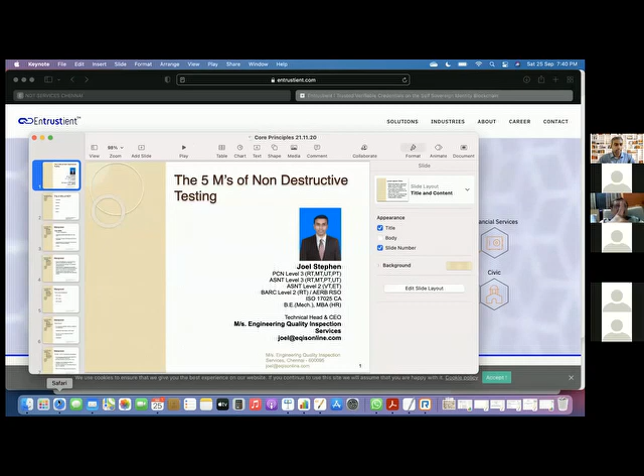As Mr. Sandeep was saying, I head an industrial commercial lab with NDT, chemical and mechanical testing facilities. We do a lot of projects in and around Chennai, focusing on new NDT techniques like phased array, and we also involve ourselves in digital eddy current testing. Our most significant project was the Chennai Metro Rail project, where we stood with the team for the complete erection of all the columnar pillars in Chennai. I'm also the founder of another company called Entrustient.

Here we deal with IT stuff we call verifiable credentials, where our certificates and other identities are not given to anybody - they remain under your control. So these are the two organizations where I'm involved with the administration.

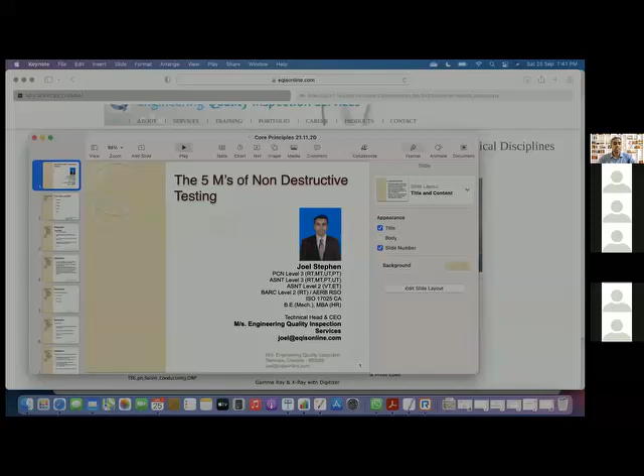So typically I would try to go to my slides. I specifically wanted to pick this topic because it's a Saturday evening, and if I were to talk about technical physics and all that, probably the participants would get reduced to half. So I wanted to do something more about decision making.

I don't want to make decisions for you. I want you to be in a position where you will be making your own decisions based on the inputs that I'm going to give you today.

I have level 3 certification - level 3 is a level of certification with both the American Society as well as the British Society. I also happen to be a radiographic safety officer with the Government of India, and I have done my HR and MBA. So these are my credentials.

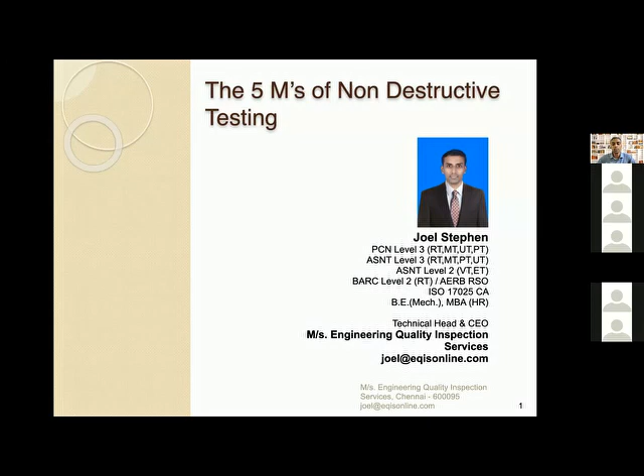So I would just go on to the technical presentation. The title, the five M's of testing, was kept as a surprise because it gives you a curiosity factor as to what are the five M's.

This is the presentation slide, and you'll have the pane on the left side, like an explorer, which will tell you where we are right now. This will help you navigate where we are in the presentation.

To start off, the five M's of NDT, or non-destructive testing principles, are manpower, machine, material, method, and the money involved. All these five factors influence the choice of NDT. We'll be going into detail on each of these topics.

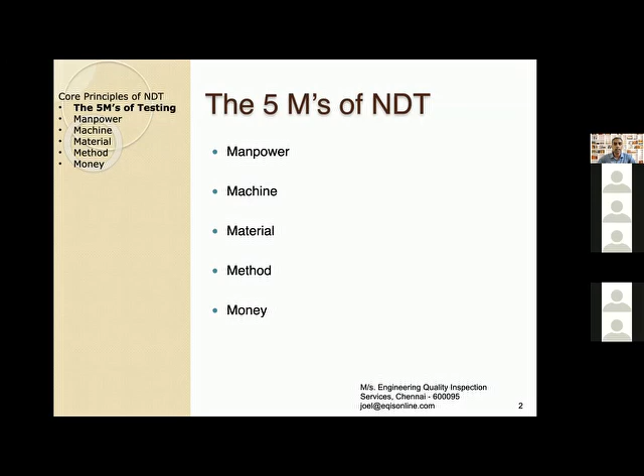If you were to head an NDT, or at some point involve yourself in an NDT activity or organize one, these five factors will help you a lot in making the right decision. So to start off, I would like to begin with manpower.

We have a proverb in Tamil that says, 'Aal padi, aadai padi,' which means the person matters more than other things. It's like half is your presentation and half is the man himself. So when I talk about manpower in NDT, it's like finding a pearl in an ocean.

It's easy to say there are no defects in the job, but it's very hard to actually find a diver who will go and pick that pearl and say, 'see, here's the pearl in the ocean.' NDT is something like that - the skill of the person is very, very important to find a defect.

Whereas 90% of regular operators will say this job looks good, there will be only one operator who will be able to find out exactly where there is a discontinuity for us to deal with. So what is required in NDT manpower is a person who has an understanding of what he does. For example, if I am operating NDT equipment, it should be like the NDT equipment is listening to me.

I should have mastery over what I'm operating. The technician should be in a position to understand and listen to what I wanted to do. It's not that the machine looks high tech and I just keep it in place and it gives me a result, and I take this as the result without any verification. It shouldn't be like that. It should be the other way around, where I know all the parameters of the equipment. That understanding comes from experience.

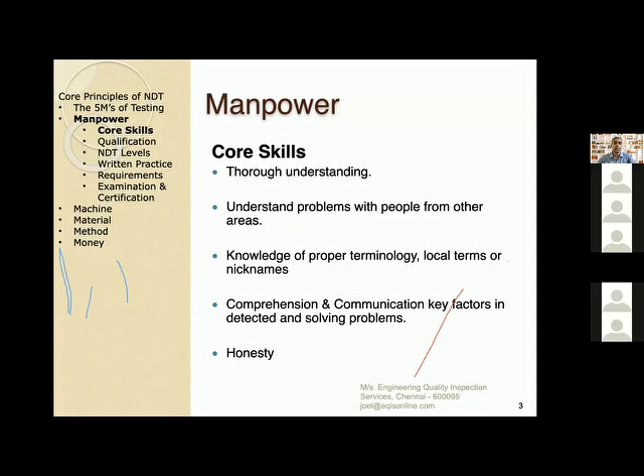So the technical societies, just like yours, have certain technical societies which have drafted documents which help - suppose there's an employer who doesn't have any knowledge about NDT and he wants to set an NDT system in his company, he needs some documentation which will help him understand or start off with what are the basic requirements. So these documents like SNT-TC-1A, ISO 9712, and CP 189 are documents which help an employer pick an NDT personnel based on the criteria given in these standards.

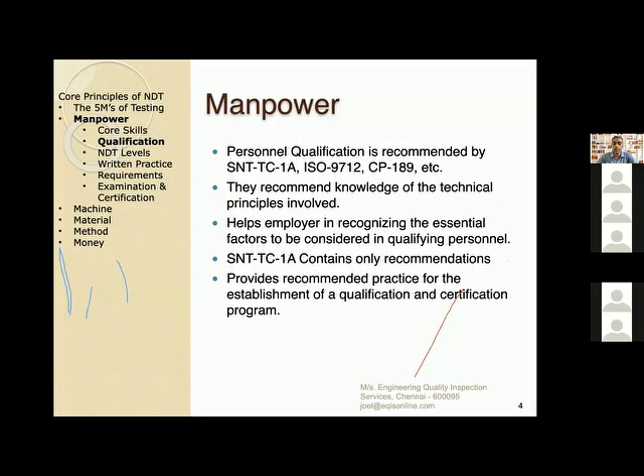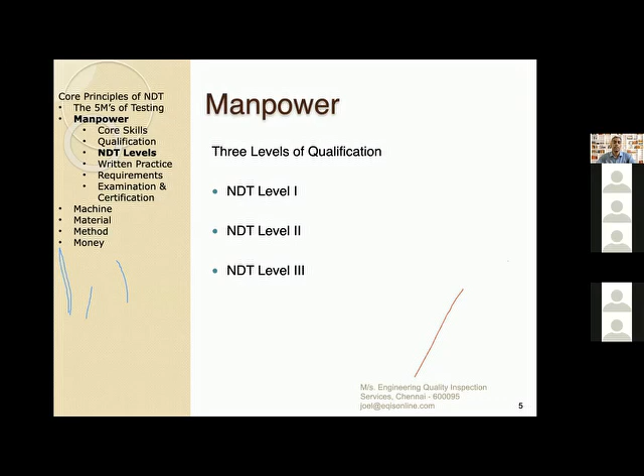So it's a recommended practice. We call it a recommended practice because nobody asks you to mandatorily follow all these, it's just a recommendation. This recommendation talks about 3 levels, where level 1 deals with just the operator of the equipment. Level 2 refers to the interpreter of the results, and level 3 defines the higher severity, where he needs to take care of the entire NDT management, including drafting, giving SOPs. Level 3 is a person who actually designates and organizes an NDT activity, he is the coordinator. So there are 3 levels, and these are well documented in a document called Written Practice.

I'm sure most of you would know what a written practice is. A written practice just says how many questions should I ask for the trainee to get selected as a level 1, level 2, or level 3? How many hours of training should I give them? What is their responsibility being a level 1, 2, or 3? And how to control the exam or administer training, control the training and qualification. What topics should I take in the class? All these are given in these documents, which is a ready reference for any employer to start off with. So any company looking forward, from an administrative perspective, to start an NDT should first get their hands on this written practice and try to understand the requirements for a person to get qualified as an NDT personnel.

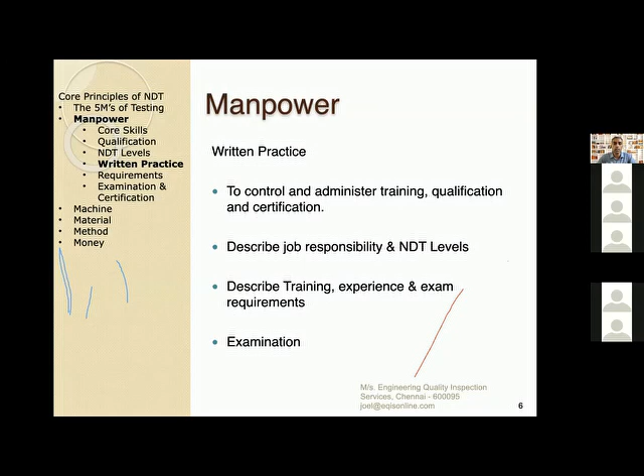And finally, to summarize the requirements of NDT, it's just a few things. You can employ anybody who has a formal education right away. You can employ them as an NDT personnel in your firm if he has formal education in physics, maths, and chemistry, and has training, and if he's done a 4-year college, then his training hours can be reduced by 50%. And if the person does not have any formal education, if he works for more than 4 years, he can still be eligible to take up the examination and go ahead with the certification. So training is given as per the written practice. And if these standards allow non-native speakers, like if they don't have English as their mother tongue, they can take additional time.

And these are the benefits given to non-native speakers. It also talks about the training hours and experience required. So these are the requirements to qualify a personnel into an NDT field.

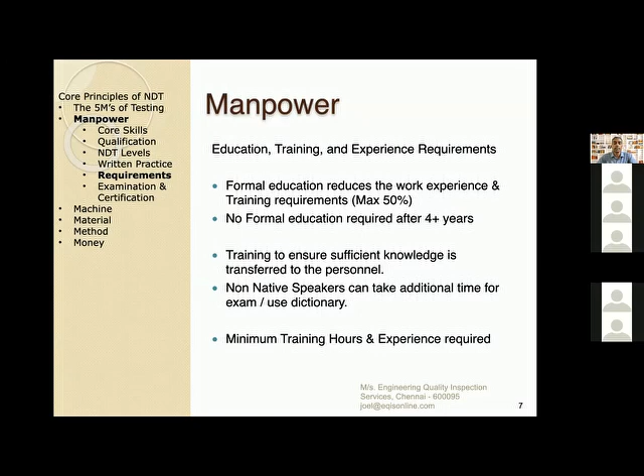And for the examination, we have 4 different examinations. The first one being the vision examination. Vision examination is very important because I have personally faced certain people who are colorblind, and they will not reveal it to us. What happens is, for most NDT techniques, your eye is your sensor. You will have to have an eye for defects, an eye for detail, where you will be able to spot the color and say this is the defect.

So if a person is colorblind and we don't have a proper vision examination, he might have very good knowledge. He will clear all the other 3 exams. And when you have to actually put him into a scene where he has to find a defect, he will not be able to do it. This is like, operation is a success, but the patient is dead. So the idea here is, the vision examination stands first in any NDT activity.

Then we have general and specific examinations, where general talks about the entire NDT principles and such things. In specific, it talks about the particular job I'm dealing with. Suppose I'm dealing with a casting or a weld, then I ask questions very specific to welds, or if there is a casting, I ask questions specific to the casting process. And then we have a practical examination.

And one common thing about all these documents that I was talking about, SNT, CP 189, and ISO 9712, is that they all demand a pass mark of 80%. All through our academics, anywhere between 35 to 50% is the pass mark. But NDT organizations require you to score at least 80%. Anybody want to guess why we need an 80% pass mark?

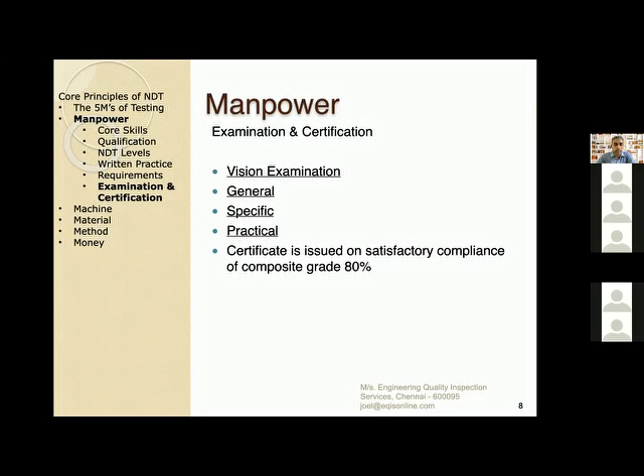Okay, fine. So the next M that we are going to talk about is the machine, or the equipment.

When we talk about the equipment or the machine, there are lots of applications where we get to decide where the machine stands. So if I have to choose an equipment, for example, let's say for a place where I have access only from one side, let's say it's a fuel tank. The fuel tank is going to have one inlet where I can pour in the fuel, but the inner part of the tank is not at all accessible.

So if I want to reach or inspect such a tank, I have to think of an equipment that is capable of scanning the entire thing only from the outside, which will help me detect if there is a problem with the product. Or if the component is too high in temperature, I'll not even be able to touch the component. Then I have to think of a non-invasive way where I can reach the component and pick or choose a method which will help me find the defect inside it.

And so forth, we have the area of interest. Suppose if it's in the nook of a place, or if it's in the center, or if it's at some elevation. These are the factors where I have to come to a point where I decide which equipment I want to choose.

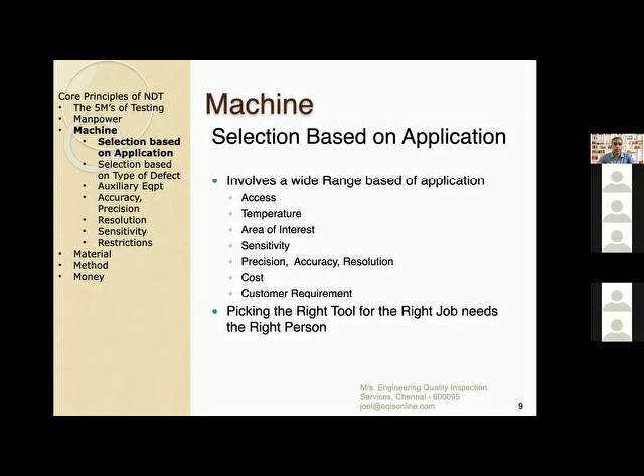Having said that, if I have to pick an application based on the defect that I want to find, then again, I have lots of defects where, if it's just on the surface, I'll have to pick an NDT technique. If it's a little subsurface and not open to the surface, I have to choose another method. And if it's a crack, for example, it's a two-dimensional defect, it's just going to be a line. So I'll have to use a technique which will be helpful to find a line.

And there are volumetric defects which are like, for example, a gas porosity or a hole, or probably a slag inclusion or a foreign inclusion. So if there is an inclusion, it's going to have some dimensions, it's going to have a three-dimensional image. So I have to choose my technique based on the defect and then pick the correct equipment for that defect.

And we also have another criteria called the contact criteria. This I was telling in the previous slide, when the temperature is too high, I will not be in a position to go and touch the component. So I'll have to use a non-contact method.

And if you talk about your hospital where we go and take a CT scan, for example, or an X-ray, for example, if you have a defect, if you have an injury in your hand, if the bone is, let's say, fractured, for example...

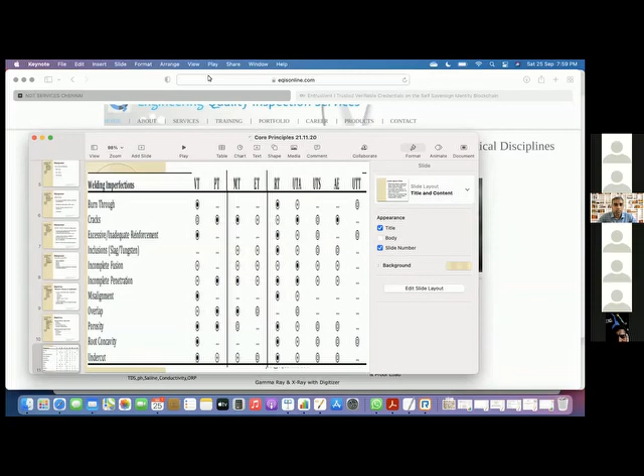Joel, your voice has gone. I think I got disconnected. Hello. Yes, Joel, you can start now. Yes, now you can start. Okay. So I just want to know which slide I was on when I got disconnected.

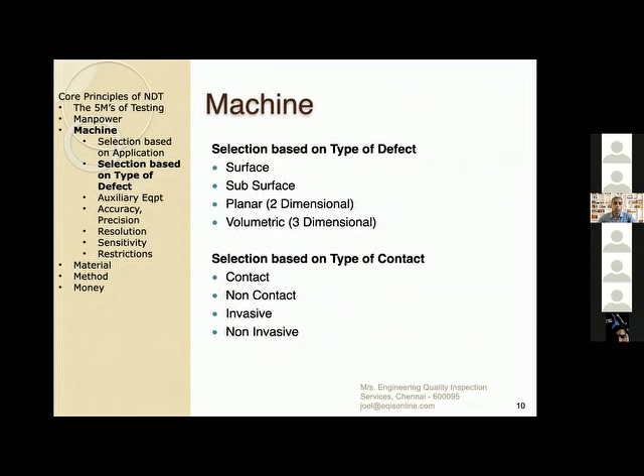So I just wanted to show you the slide where we can see the type of NDT technique on the top and the defects on the left-hand side, and which technique would help us to find it. So VT stands for visual testing, PT stands for penetrant testing, MT stands for magnetic particle testing, ET stands for electromagnetic testing, RT stands for radiographic testing, ultrasonic testing angle, ultrasonic testing shear, acoustic emission, and ultrasonic thickness gauging.

So it's just an overview. The black dot here says it is 100%, or the probability of detection is very high. The one with the star says it requires special techniques. And one with the circle says any standard method with the proper technique, and only then you will be able to find that defect.

So it is very interesting to note, for example, if I have a crack in my component, radiography testing is what most people get into their mind, that if I take an X-ray, I'll be able to see the crack. But on the contrary, this is not the right method to detect a crack. X-ray will not reveal any cracks, and it requires a very special technique if you want to find a crack using radiography testing.

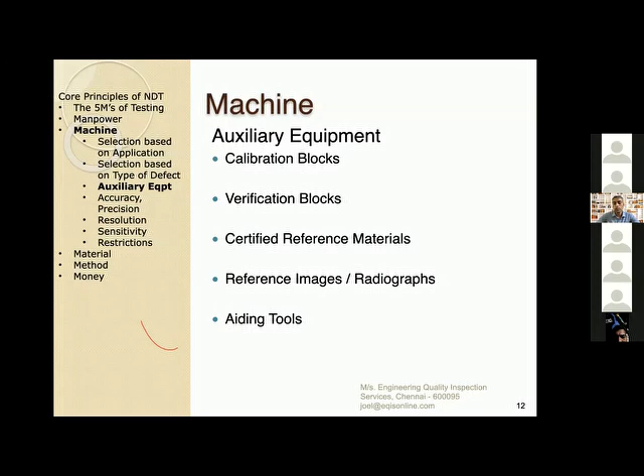So to give you a typical example, I want to show what happens when your machine is not working properly. Suppose I have a weighing equipment, and my mass is 10 kg, but every time I weigh it, it gives me 5 kg minus or 5 kg plus. So it will either say 5 or 15. The error is always 5 kg, but it's consistent. The point is, it is either on the plus or on the minus, but the 5 kg error is not going to change. So that is not going to help me.

But if I validate with my auxiliary equipment or my verification block, I'll get to know how much my equipment is deviating.

Do you want to take a question? I think I had a raised hand.

So when we talk about precision, here the case is I'm always getting a 5 kg error on the positive side. If the mass is 10 kg, my machine is going to show me 15.8, 15.2. This means the values are repeatable. The repeatability is very good, but the accuracy is poor.

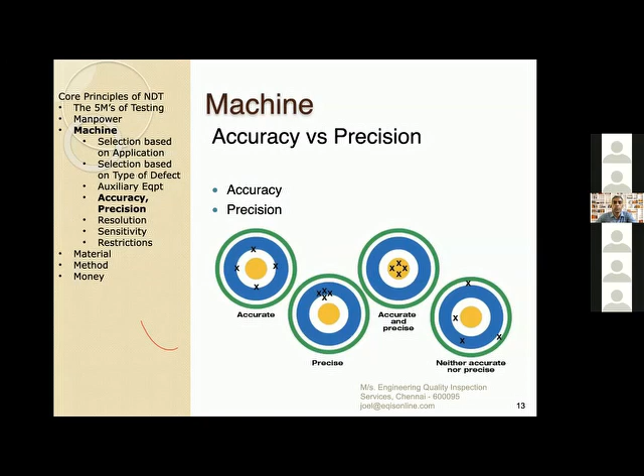But when I say an equipment is accurate and precise, that means it's always showing me close to 10, showing 10.2 or 9.8, within the range of precision that I require, and the values are repeatable. The same goes with any NDT equipment, where you also have to be precise with your results. The repeatability should be there, and you should also have accurate results.

Another factor that goes along with the equipment is the resolution. With any digital equipment, resolution refers to the smallest change in value. In NDT equipment, suppose I have two defects very close to each other. If my resolution is poor, it's going to show me the two defects as one defect. If the resolution is good, it will show me both defects as two separate defects.

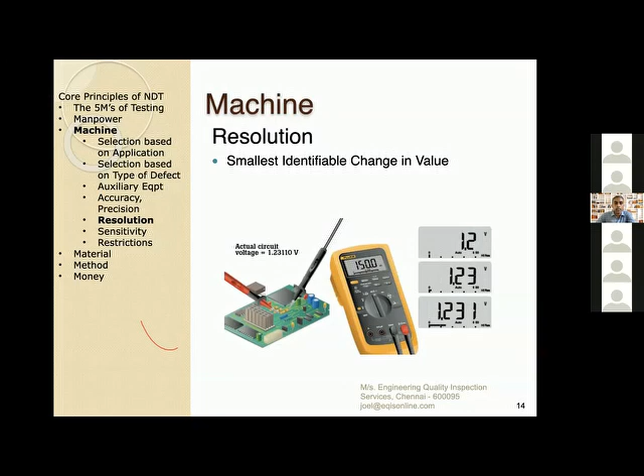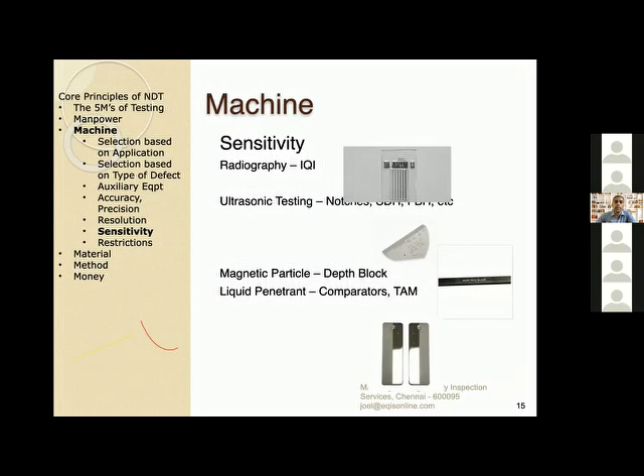So the resolution is otherwise called sensitivity. In radiography terms, we don't call it resolution, we call it sensitivity. Sensitivity is nothing but how small a defect I can detect with radiography or any NDT technique. For example, the sensitivity we usually deal with in nuclear applications is 1%.

And with boilers and other critical applications, we deal with 2%. Let me explain what this 1% and 2% means. Suppose I have a 100 mm block, and I need to find a defect inside it. If I say my sensitivity is 1%, 1% of 100 mm is 1 mm. So I'm telling my customer, if I give a sensitivity of 1%, it means any defect greater than 1 mm is detectable using the technique I'm using.

So for example, if there is a 0.5 mm defect inside the component, I'm warning my client that I will not be able to find that defect because it is less than 1%. Most NDT standards require us to give a sensitivity anywhere between 2 to 5%. Special applications require achieving a sensitivity of 1%. The concept is how small a defect can be allowed. There is nothing called a zero defect component in this world. If I'm able to achieve acceptable sensitivity as per the requirement, then we are good to go with the customer.

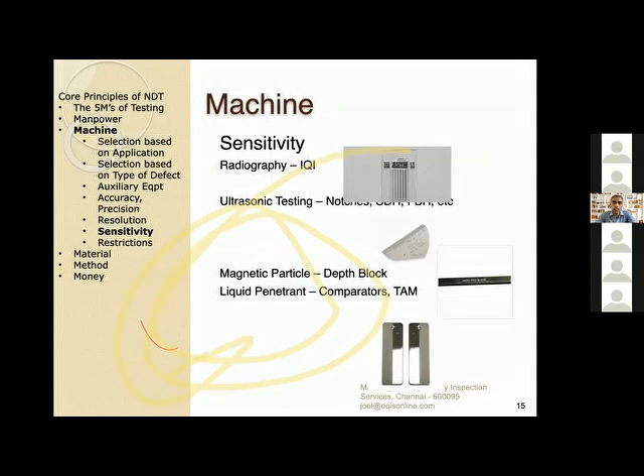Another factor when choosing equipment is the restrictions of each method. I'm sure all of you know the basic NDT techniques we use in our day-to-day lives. When I talk about liquid penetrant testing, PT, this is an important thing I usually convey to my participants: if you do a PT test, you will be able to detect surface defects.

Even if there is a small micron level hole with a reservoir inside, PT will still be able to find that defect. But if the surface opening is closed, and you don't have an entry point from the surface to that defect, then PT will not be able to detect it. One typical case we do in a real life scenario is, we inspect PT on a glass.

So what happens is, glass is a transparent material. Once we apply PT, the penetrant tries to get absorbed into the small orifice in the surface and it travels inside the glass. So it's a wonderful sight to look into, where you will see the orifice through which the penetrant gets inside and slowly gets broad into the defect and opens out the defect. So again, if the surface is closed, you will not be able to detect it with your PT.

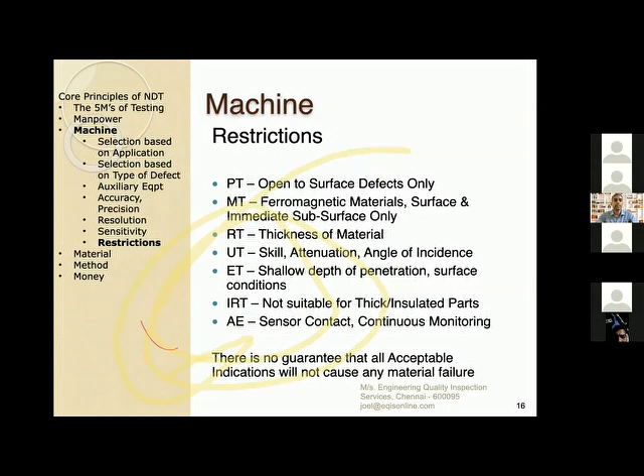So quickly, I would like to go to the next M, which is nothing but the material. The thing is, materials as such are very, very vast, and I just want to quickly run through the factors that influence NDT based on the metals. So as such, the common categories of metals are metals as such, ceramics, which is again non-metal, and semiconductors, polymers, and composites. So metals is what we use in our metal industry in our day-to-day fabrication.

Ceramics is a lot more brittle. It is more prone to crack. It cannot take load, but it has excellent scratch resistance, chemical resistance, corrosion resistance, and it can be used for making polished surfaces, which will not be possible with the metal surface.

And we have semiconductors, which are modified metals, or probably the lanthanide actinide series, where silicon or whatever it is, the non-metals basically are tweaked with some other element so that it becomes partially conducting material, which is used in your computers and other electronic devices. Then we also have our polymers and composites.

So why am I talking about all these material categories? It's because NDT can be used in all these materials. You can use NDT for all the category of metals. And again, I want to talk about the crystal structure, the fabrication treatment, and the finishing of the metals, which will again affect NDT.

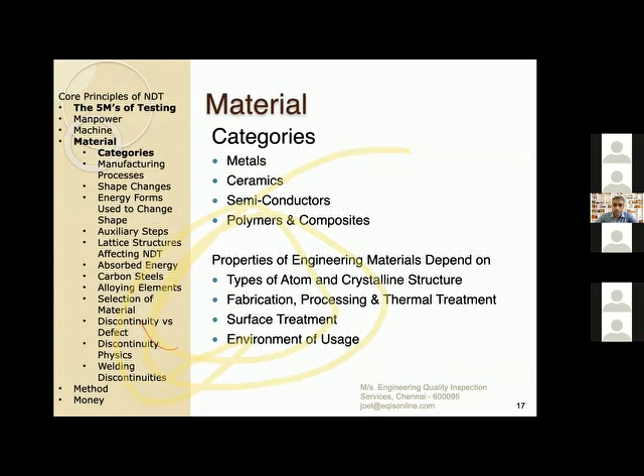Yeah. Hello. Yes. Sir.

Having said about the categories of metals, we also need to know about the manufacturing processes, which will again affect the NDT process. Like suppose I have a metal that is liquid, and if the form of the liquid is getting changed into a solid form by use of heat, then we call this process casting. And casting has its own manufacturing inherent defects, or primary defects, which will get captured inside the casting, and we have to use a technique which will help us find the casting defects.

The same goes with the machining.

If I have to reshape a material in a plastic form without melting it to a liquid, if I just keep it in a semi-solid or plastic form and try to do molding or hot forging, or put it on a press and change its shape, then these processes are going to induce a particular type of defect which I have to deal with, and I'll be showing you all those discontinuities. If I use a machining tool, I'm going to induce a surface crack on the component by use of, if my machine speed is too high, if my tooling depth is too high, then I'm going to induce a heat-induced stress inside the metal, which is going to develop a crack. I also have this welding process, which is similar to casting, but it's a localized form of melting a particular place and then joining them together as a weld.

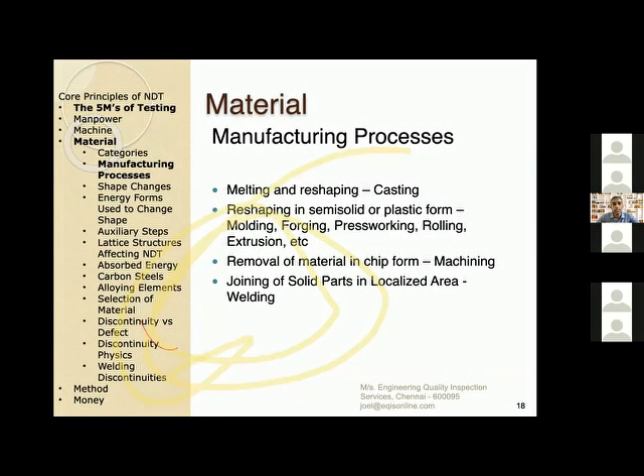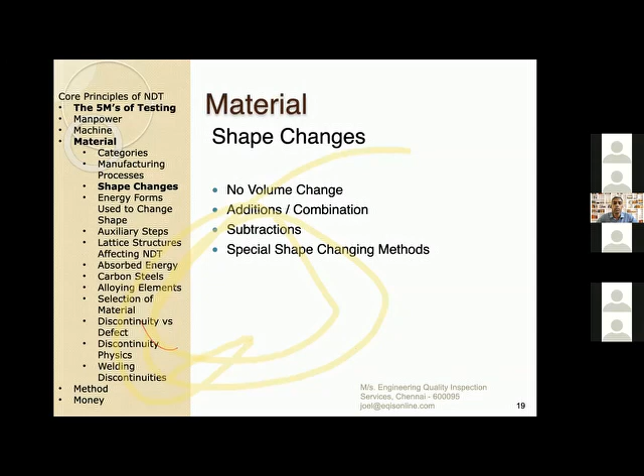So when I have to talk about shape changes, there are four types of changes, where one is a volume change, and the other is I don't change the volume but just add, subtract, or change the shape by some method. So here I wanted to show the slide where there are two categories of changing the shape. One is by not changing the volume at all.

Let's say I have wax in my hand and I want to make a candle out of it. The entire volume is getting converted into a different shape, so there is no loss in volume. The process is casting, basically. So I have a volume of molten metal which I'm going to convert into another shape by use of a liquid flow, or by deforming the solid, like a powder pressing process where a powder manufacturing machine compresses the powder and creates it into a plastic component or something. Here the loss of volume is very, very little or negligible, because I'll be reusing the entire volume in changing its shape.

And when there is a change in volume, like for example I want to machine it, or treat it chemically by putting a plating on top of it, or remove a coating by use of a corrosive element, then all these affect the volume. So when I change the volume of a metal, I'm trying to change it by use of a chemical method, applying heat, or joining it mechanically by welding, laser, and other special methods. When I'm trying to join two metals that are completely homogeneous separately, and bring them together, I'm changing the volume of the material, which has its own kind of defects induced during that production process. So basically, whenever there is a change in volume, the chance of getting a defect is higher compared with a casting defect.

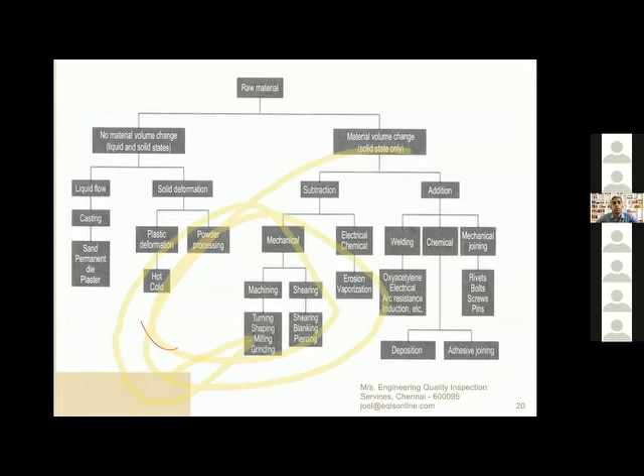But casting is like an inherent defect - we call it a dormant defect, for example. A usual defect with casting is, let's say, porosity. Porosity is a gas, so it's going to have smooth edges. Whereas if I'm dealing with a volumetric change, then there are going to be cracks, which means the crack is going to be more susceptible to failure than a porosity. I will explain that in my forthcoming slides.

So these energies that we use - for example, let's say I'm using heat to change a material - what happens when I apply heat is I'm altering the grains of the material and changing it to different phases of the metal. Suppose I want to heat treat a material: above the Curie temperature, I'm trying to change the grains of the metal so that it either becomes more uniform and the crystals are aligned properly, and this will relieve all the stress inside the metal. So basically, when I use an energy form to change the shape, the metallurgical properties change. And in this particular case, not just this case, any case for that matter, all these processes invoke a defect in one way or another. So a typical case where heat treatment is done, we see a lot of surface cracks coming out from the component once it's heat treated. The overall benefit is achieved - the metal is taken above the Curie temperature, the surface is hardened, and everything.

But ultimately, when it comes to NDT, we end up finding lots of surface level cracks. So this is the reason why I'm trying to show what processes cause what kind of defects in your NDT.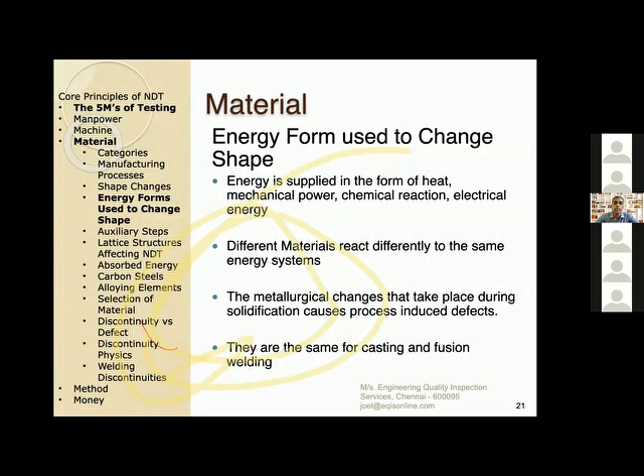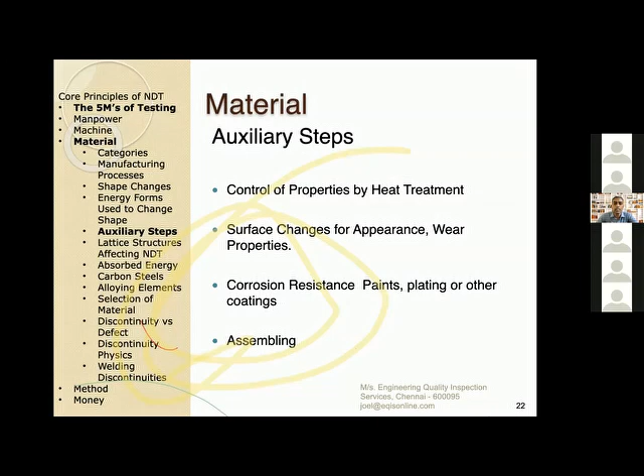Now the other requirements to change the shape are like when I have to put some painting on the material, or if I have to change the abrasive property, or I have to assemble it. If the component is too big and I cannot ship it in one piece, then I'll have to split it into two parts, load it on a commercial vehicle, and then once it goes, I should be in a position to assemble it together. So all these steps require NDT at some point or the other, because anything I do to change the shape of my component is going to affect the material grain structure and induce one defect or the other inside my material.

So I was telling about this lattice structure in the previous slide. I just want to quickly run through the concepts which all of you are aware about. If I talk about body-centered cubic structure, for example, iron as such is called polymorphous because it can exhibit its character in BCC and FCC. If I put it above a certain temperature, it's going to change its crystal structure to an FCC structure. So what happens in a BCC structure at room temperature is it has a packing factor of 68%, which means the remaining 32% inside the atom is free.

So the density automatically reduces. And when I'm trying to break this component, it's kind of going to break easily compared to an FCC structure. So the packing factor determines the strength of the material. And basically this strength determines the tensile properties or the physical properties of the metal. And in fact, ultimately this choice of metal helps us in picking the right NDT method.

Because if I say I'm dealing with, let's say, a BCC structure, for example my material is such, let's say it's a low carbon steel material or a low alloy steel material, I will be looking for defects that come from its alloys. Like for example, there'll be a small content of carbon, probably manganese, and all these processes are going to have oxygen trapped at some point or the other. So when there is an oxygen trap, then it's more prone to rust.

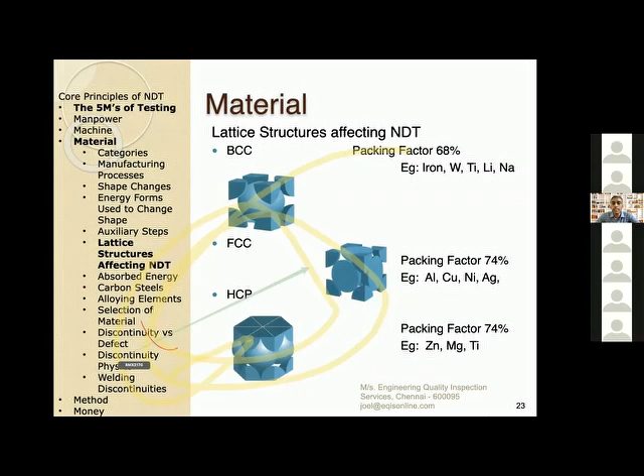And again, packing factor of HCP and FCC is the highest density possible with the material. So FCC and HCP are going to give me very good tensile properties. And obviously these are high strength materials, which means when the toughness increases, the material is going to break like a biscuit. So the ductility property of the steel is what we look after.

It's like rubber. Steel is like rubber in the metal industry. It can take a lot of shocks and still be in the elastic region and come back to its original shape. So when I'm trying to increase my hardness, or when I'm trying to increase the structure or choose a different material, then definitely my strength is going to get lost, and I will be looking for more cracks on the surface because it's getting more tough and more brittle.

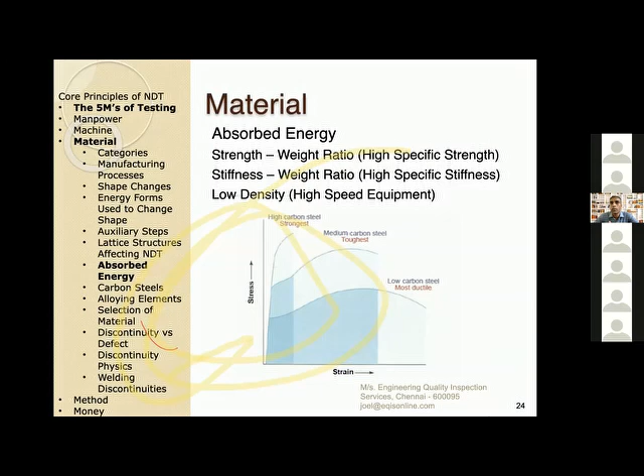So this particular stress strain graph shows how low carbon steel, though its stress taking capacity is very low, has a lot of ductile properties, which means it can elongate comfortably for a particular period of time and still get back to its own spot. Whereas if I'm talking about medium carbon steel, it's going to break somewhere halfway through a low carbon steel. And if I take a high carbon steel, it's more prone to getting cracked. I have seen in physical cases where anything above 25 mm of thickness in carbon steel definitely breaks. It doesn't work out in NDT.

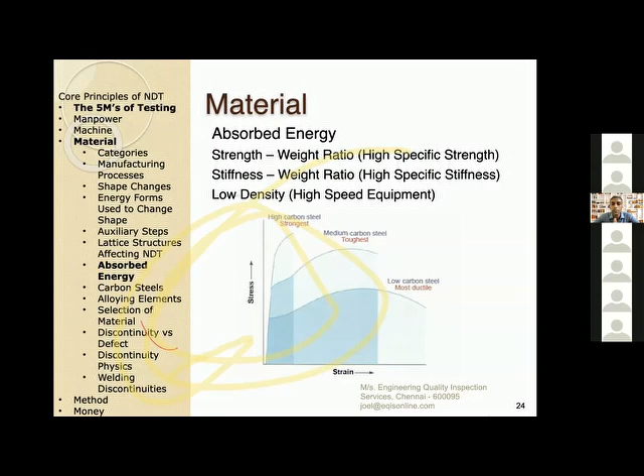So again, coming to plain carbon and low alloy steel, whenever there is more than 7% of alloys added to a steel, then we have austenitic or stainless steel, for example. We face a lot of issues with the NDT because there are lots of grain structures which prevent ultrasonic waves, for example, from passing through such austenitic steel. So we get to use special techniques where, since it is alloyed, we are forced to use different NDT techniques to make sure that we are able to test such alloy steels.

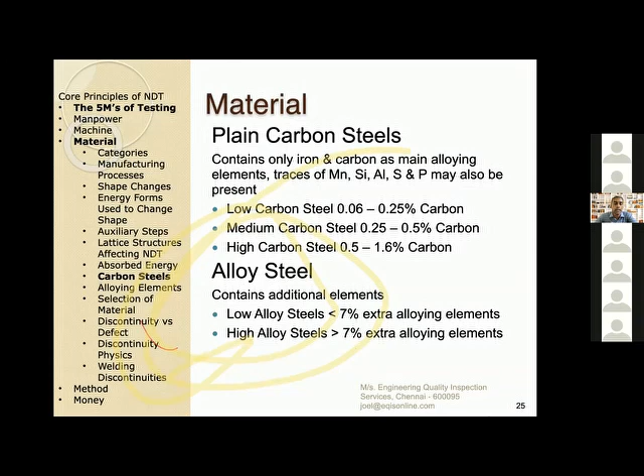Okay, so quickly talking about the elements which influence alloys. For example, let's say carbon. The more carbon that I add, the more brittle it's going to become.

If I talk about silicon, for example, it's a good deoxidizer. It will absorb all the oxygen. If you take any electronic equipment, they'll put a few silicon bags inside. So if I keep silicon inside my metal, it's going to absorb all the oxygen, which otherwise, if it gets in contact with hydrogen, would give me hydrogen induced cracking. So I want my oxygen removed from my component. This is why we alloy silicon, to make sure it is deoxidized.

And so is the case with manganese. Moly helps us increase the strength or tensile properties of the material. Chromium helps us in corrosion resistance, and nickel also helps in increasing the toughness of the material.

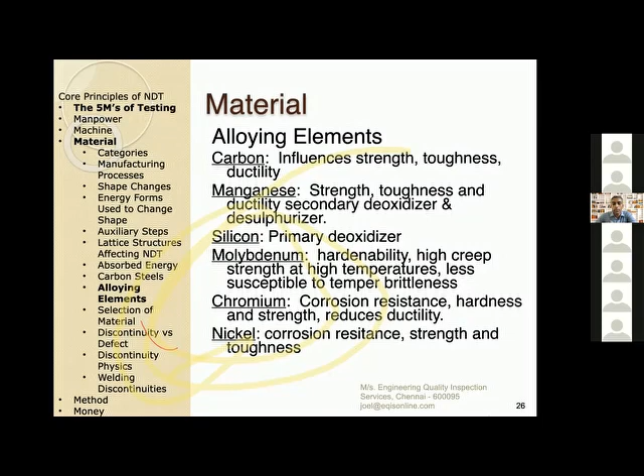So to tell you why I'm talking about material selection: any metal, the abundance of metal is more common with steel, and most of our NDT techniques are devised for all the procedures as such, and all the technical information that we have mostly deals with steel. Since it's abundant and used everywhere, we need such extensive documents to help make sure all the NDT processes are validated.

Hardness, for example, let's say a designer wants to have a bill of material ready for a particular drawing. He has to mention what type of testing he has to do for that material. So he gives a tensile property requirement, an NDT requirement, and also certain dimensional requirements.

So if a material sheet is given to us, and we see that an NDT is required in the drawing, which means, as I told you previously, there is life risk involved in that drawing or specification, and that is why NDT is involved. So we have to ensure that whatever the designer has required, or the acceptance criteria given, is met with the material.

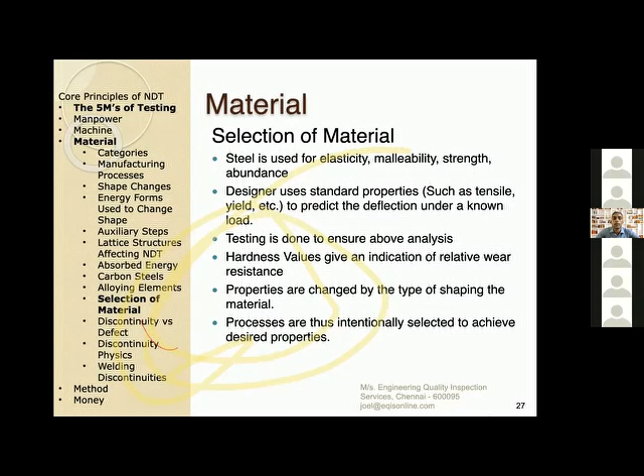So here I just want to tell you the difference between a discontinuity and a defect. The selection of material tells us what type of test I have to do, and here's discontinuity versus defect. Discontinuity is nothing but when there is a homogeneous structure and there is some discontinuity, then we call it a discontinuity, which can be or cannot be a defect. But when I say it's a defect, then it is not meeting my requirements.

For example, I am trying to make a lid, a very critical lid. Let's say it goes to the head of a tanker. Here I would accept a defect of up to 10mm. But if the same thing goes to a less critical application, let's say this lid goes to a drainage pipe, I can say instead of 10mm for this application, I can give an allowance of 20mm, that the size of defect can be up to 20mm. In that case, I will be in a position to accept this lid, not for the tanker, but for the drainage cap. So the discontinuity is an identification of a lack of homogeneity, whereas a defect is not acceptable as per the requirements of the customer.

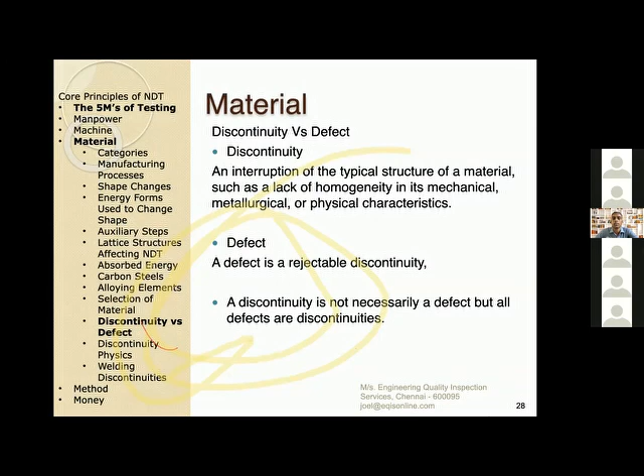So to give you a brief overview of what happens when the material is not homogeneous, I wanted to put this drawing here, which shows that whenever something is homogeneous, you have the complete metal with nothing in between. But let's assume I have a hole here. This means the surface area that can take the impact is reduced, and this hole is not going to give me any strength because it is empty. So if I'm trying to give a stress to this component, just because there is less surface area for the load to act upon, the material is going to fail. This is where standards play an important role, telling us what size can be accepted for this application.

Another typical problem is cracks. We all know that stress is load by area, Newton per millimeter square or whatever unit, load divided by area. So when I'm decreasing my surface area, my stress is going to increase. In the typical case of a crack, the tip has the smallest area, so when the tip is nearing zero, the stress is going to go to infinity.

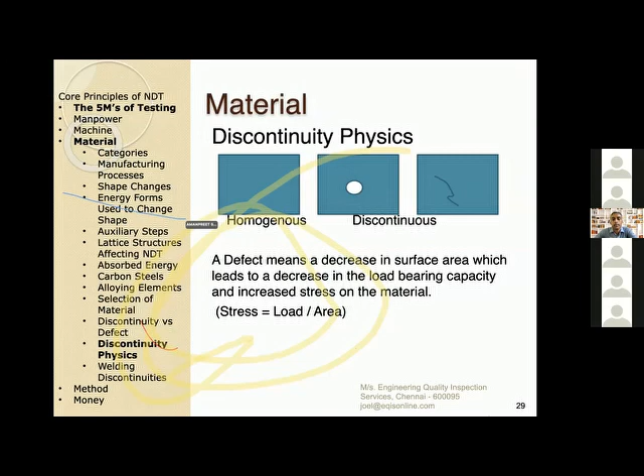So if there is a crack in the metal and I give it stress, the tip of the crack is going to propagate because it has stress at infinity. This is why cracks are considered a very severe defect compared to a round or spherical or uniform shaped defect, because that kind of defect stays dormant most of the time and has smooth edges which will not propagate. Whereas here, since it has sharp edges, one small impact and the crack will grow, another impact and the crack grows again.

This is why cracks are considered very important when we talk about defects in a metal. When we talk about welding discontinuities, most of you would know the common defects are cracks, heat affected cracks, concavity or convexity - which is the weld getting concaved inside the metal or convex like it's bulged on top. Then we have incomplete penetration, incomplete fusion, excess penetration, and undercuts.

So I'm just giving you a brief overview of how a material can impact the decision of NDT.

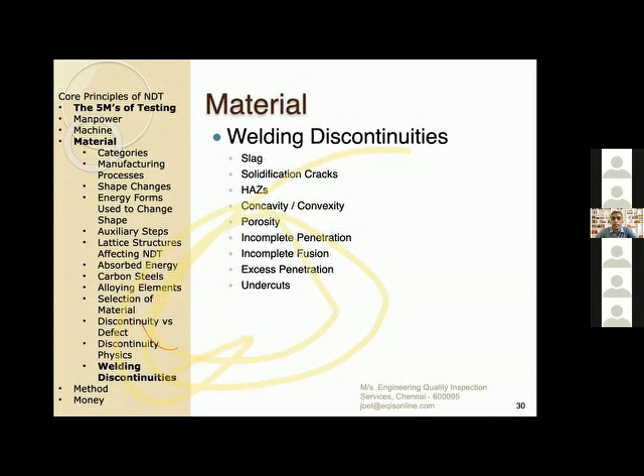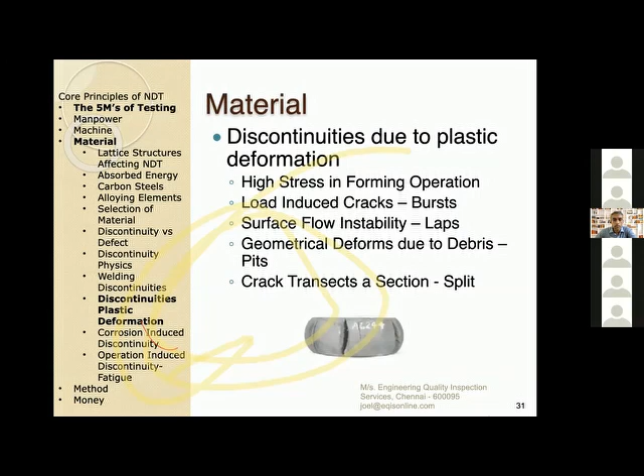The other common defects when it comes to forging material are bursts, laps, and pits due to debris in the rolling process or whatever. Then we have a split because of environmental factors, or repeated cyclic load which causes a split in the metal. And we also have localized attacks, like for example, let's say there is a small hole.

Hydrogen's atomic number is 1, so it's the smallest element, and it can easily penetrate inside a small crack. Once it penetrates, it will mix with the oxygen inside the metal, or form hydrogen sulfide, which causes immediate corrosion. So any defect on the surface that is localized is very severe, and it causes permanent damage which cannot be repaired on the metal.

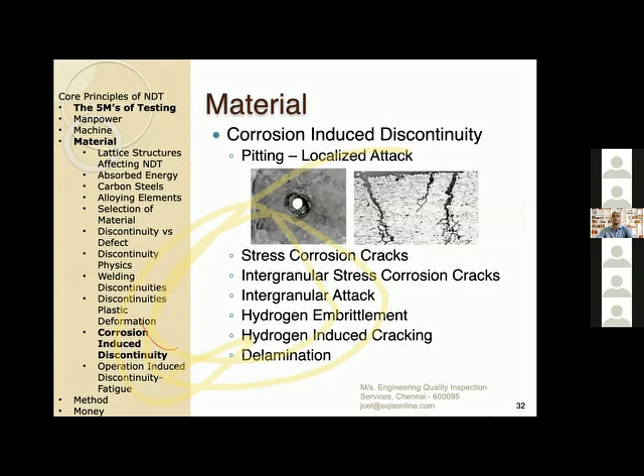Then finally, fatigue and creep - these are the two topics I wanted to show. Fatigue, as we all know, is tiredness. So if I have to run through an entire evening and once I finish the presentation someone says let's listen to another presentation, then you're tired - that's where you break down. So fatigue is not instant, it's over a period of time the load gets accumulated, and at one point it is going to break.

This kind of defect can easily be seen when we do tensile testing, where if a material is really stressed out, it tries its level best to stick on, but at one point it will break and have some edgy defects. Whereas if a material is very brittle, let's say it's going to break like a biscuit, the fracture specimen will have very smooth edges and will almost look like it's broken like a biscuit. So this is where fatigue plays in.

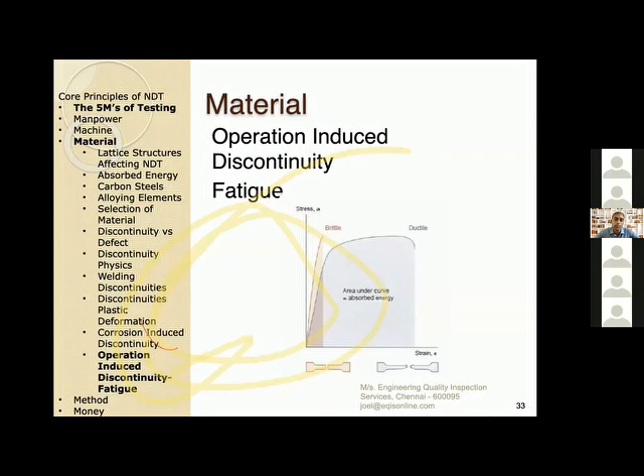And similarly, when I talk about creep, it is not cyclic load - slowly giving it a permanent load, which develops in its primary, secondary, and tertiary stages until it finally fractures.

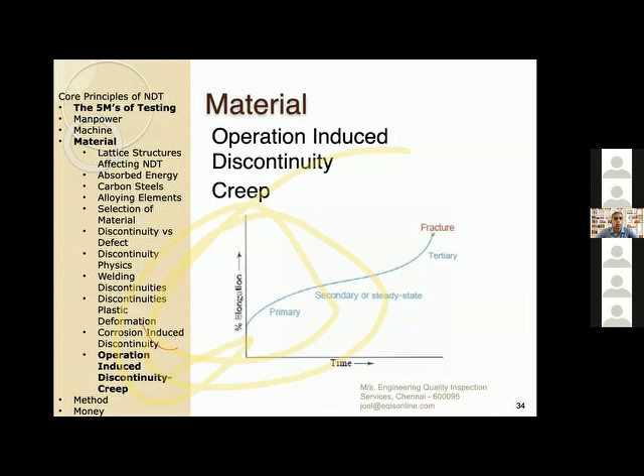So quickly finishing the material, we need to know about the NDT method. The NDT method deals with the requirement - what sort of method should I tell my man, what equipment should he use on what material. This is where the method plays in.

So what I will be telling is, as an employer, I should be in a position to give my NDT technician a set of clear-cut instructions as to what equipment he should use, how he should validate his machine, and on what material he should use the machine.

So if the equipment is working properly, the man is excellent. And if he's doing a magnetic particle testing on an aluminum component and coming back saying it is looking good, then the whole principle is lost. Aluminum is a non-magnetic material, so there is no point doing magnetic particle testing on a non-magnetic material. So the need for giving clear-cut instructions is another important factor for the NDT process.

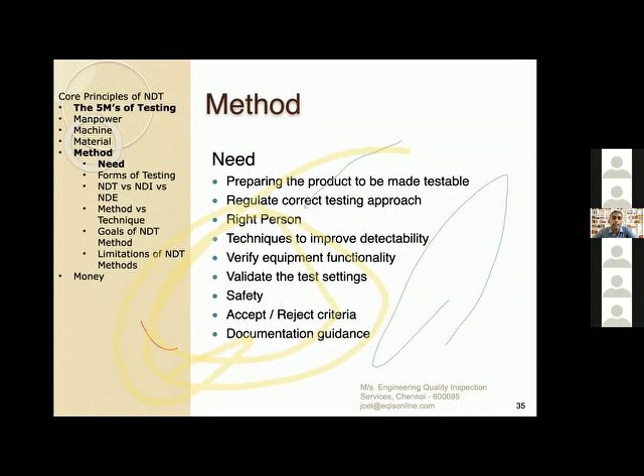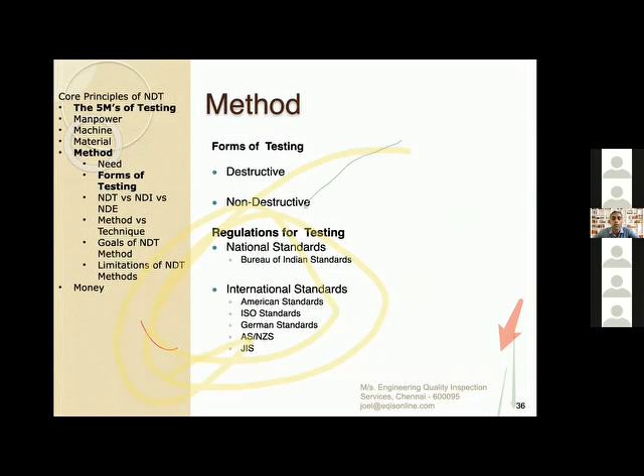We have to be very clear with our SOP and tell them this is what we have to do. And to control this, we have several standards from the national and international bodies, which I don't have to tell you about. You're all experts in the standards, where each standard has its own requirements.

So one point I want to stress here is there are very funny standards. For example, I have seen a standard for an aluminum specification which says you can have porosities. The number of porosities accepted is 3000 times the thickness of the metal, which means, let's say I have a 10mm thickness, I can allow 30,000 porosities in that component. That means the standard is trying to say, don't consider porosity a defect. If the component is full of pores, please accept it.

And these are standards which try to make sure you're not rejecting on the wrong basis, because the application is very lenient. So all these standards, some even national standards for a particular country, clearly define where you need to accept a particular method.

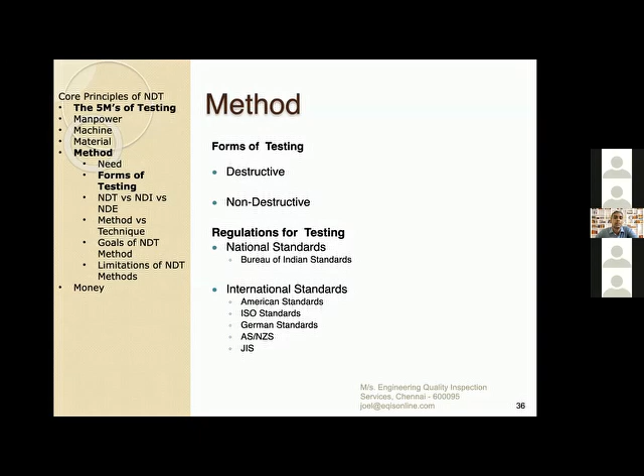And then we finally have this method confusion with testing, inspection, examination, and evaluation. A lot of times in my training, I get this question asked: what is the difference between testing, inspection, and examination?

So I wanted to put this slide here because when I say non-destructive testing, it means on-the-field testing and taking in the results, or an on-the-spot answer or resolution for the testing. So it is just one data point. But when I say it's an inspection, it means I'm taking the data, collecting it, giving a lot of trials to it, and then coming to the final conclusion. That's my inspection. So testing is just one data point, inspection is a collection of data.

And examination is like wisdom derived from the inspection data. So I make sure I take the inputs from each NDT testing, analyze the pattern, and then come to an evaluation or examination point where I scientifically conclude this is the defect available on the equipment. Then we have evaluation, which is an even more scientific approach, where we bring in all the statistical data over a period of time, the probability of detection, and many other factors, to make sure it's a very scientific approach to the NDE examination.

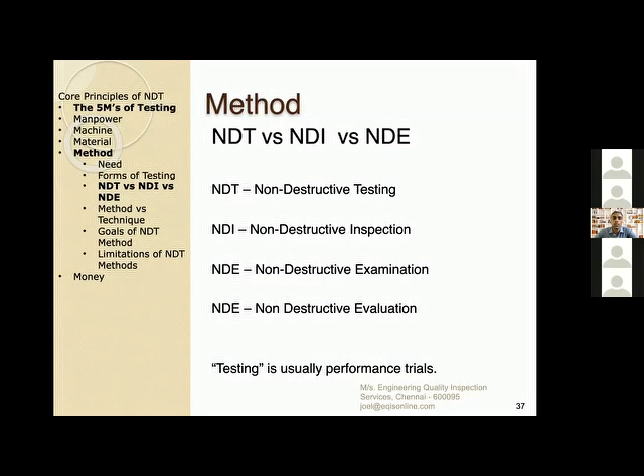To give you a difference between technique and method: if I say I'm doing a particular technique, for example radiography testing, and specifically the single wall technique, that means there are many techniques inside a method, but I'm interested in a single technique. So there are 16 recognized methods in NDT, but each method has several techniques inside it. It's like saying if you want a lamp, you can fit it on the wall, hang it over your head, or put it underground and project it on top like a spotlight. So it's one method, but different techniques.

So I will quickly run through the different types of NDT methods. Acoustic emission, AE, stands for acoustic emission. It's like we listen to the sound emitted by metal when it is subjected to a crack. You fix a sensor to a metal and it keeps listening to that sound all 24 hours, 365 days a year. When there is a crack, it creates a small noise, and this noise is captured by the acoustic emission technique, which is a permanent setup that monitors continuously.

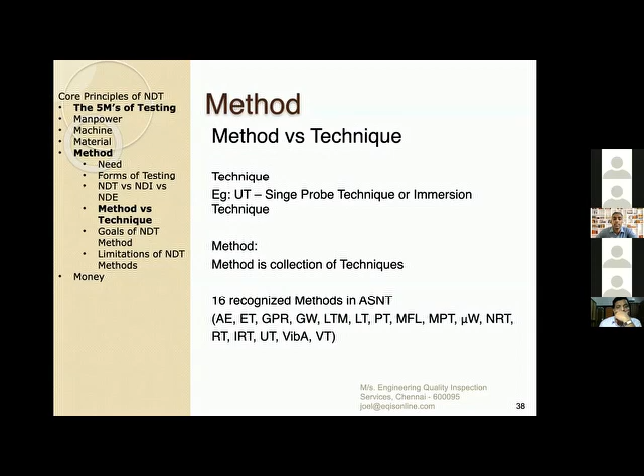Then we have leak testing, where we check for minute leaks of gas or air, penetrant testing, magnetic flux leakage, magnetic particle testing, microwave testing, neutron radiography, radiography testing, infrared thermography, ultrasonic testing, vibrational analysis, and visual testing. So these are the different methods, and if you want, we can have another discussion on the different techniques and the basics of each of them.

Ultimately, having said all this, the ultimate goal of any NDT, or any fabricator, or anybody for that matter, at the end of the day, it's going to be a business. What profit am I going to take out of it, and what am I going to gain by following an NDT? So what we tend to achieve is we try to make sure that we have a uniform quality level over the industry, so that anybody who does NDT will have a uniform level and make sure that it is acceptable to a particular standard. That is one primary requirement of an NDT method.

Then we have to make sure that all these failures and other things are avoided. If I say I have to have a particular method, particular machine, particular material with a particular accuracy, then I'm trying to make sure that the test is integral and reliable, which means anybody, any person with that same test parameter should be able to have a repeatable identification of a particular NDT technique.

Then we also have to make sure that the product is operationally ready. Suppose an NDT certificate is tagged on to a component, you can right away use it because it is NDT examined. So we are making sure the readiness of the component is assured.

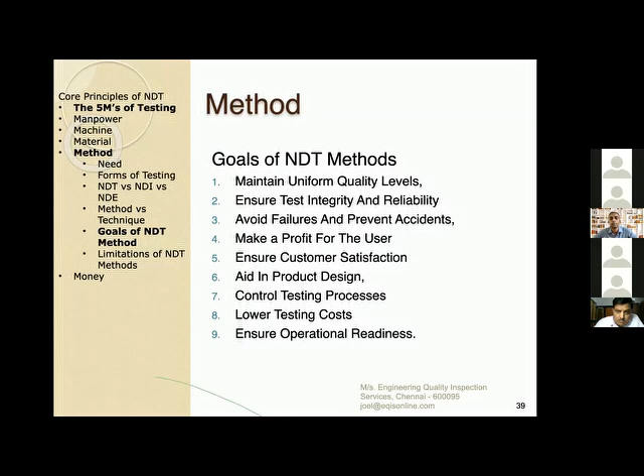So all these are the primary reasons why we have NDT methods. And again, when I talk about the limitations of such methods, it does not ensure that all defects are found. It is just a guidance or a recommendation, or probably a way forward to make sure maximum probability is achieved. But again, it still depends on the operator and his level of honesty, which means I may or may not detect a defect even though I have all these systems in place. So these are the limitations of NDT.

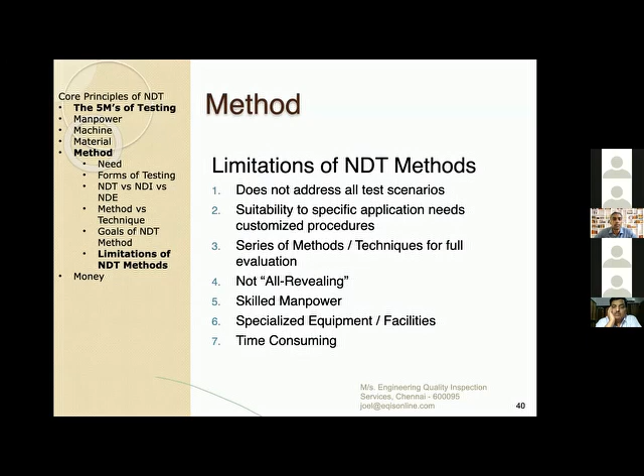Quickly finishing off, money is another factor where NDT is decided upon. For example, as I was telling you, we had done a CMRL project. The designer has a requirement of building the pillars for the columns. So what he does is, if the design says the pillar's diameter can be 1 feet, 12 inches, or 1 feet, what the designer does is he changes the design and changes the requirement to 1 meter. Instead of 1 feet, he changes it to 1 meter, because once he changes it to 1 meter, he takes care of a lot of irregularities with the concrete mixing.

He doesn't have to worry about what rod is being used, if the rod is properly tagged, and if the thickness diameter of the rod is proper. So instead of saying 1 feet, if he says 1 meter, all these unaccounted things are taken care of, and he can easily waive off NDT. These are very important factors which people consider when they want to choose, or maybe skip, an NDT process.

So again, the other factors that cost money are when the inspection facility is not available in a particular place, which means I have to shift the component to another place and transport it back. So all these are critical factors where I have to decide whether to invoke an NDT system in my own place, or probably outsource it.

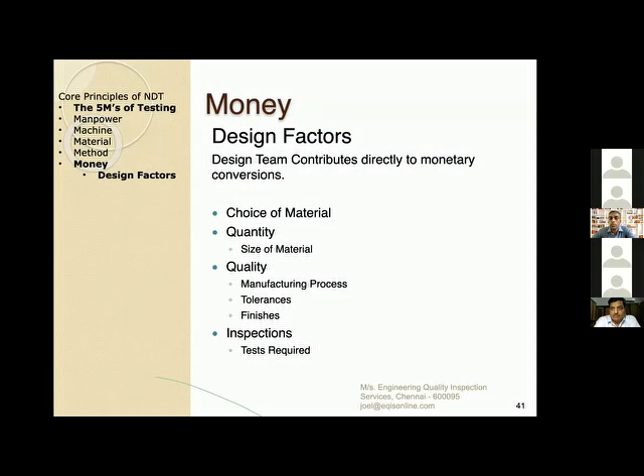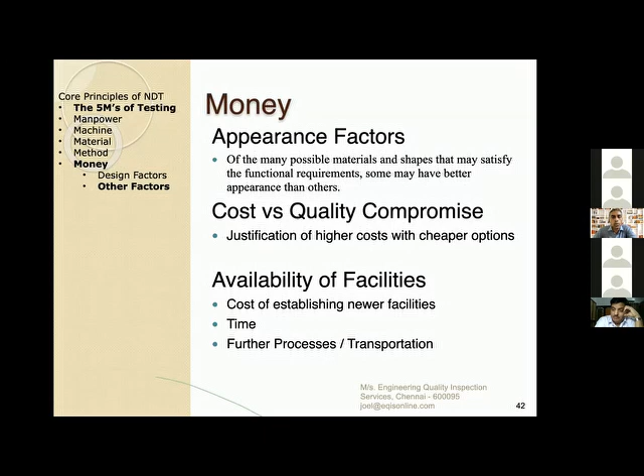The quantity and quality of inspection needed are monetary factors that help us design what kind of NDT process to choose. The cost and quality is a factor I have to consider before selling a product. I cannot do NDT on small components that sell for 1 or 2 rupees when NDT costs 600-700 rupees, so it doesn't make sense unless the component is critical, in which case they spend for it. That's the cost versus quality compromise. Ultimately the money factor is about where my component is going and how I'm going to use it, and this is where all these M's come into play.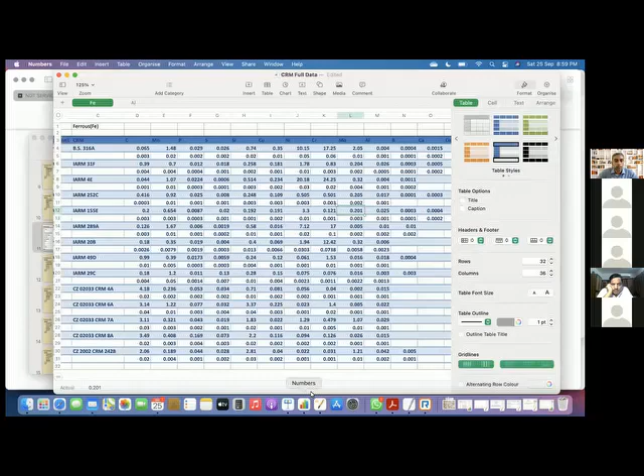Instead of me suggesting, I just want to quickly show that slide where ASME section 5 gives you the right way. According to me, electromagnetic testing should be the correct way forward. So which means when I'm trying to detect a crack, the best method is not radiography testing, and it's not UT shear wave testing.

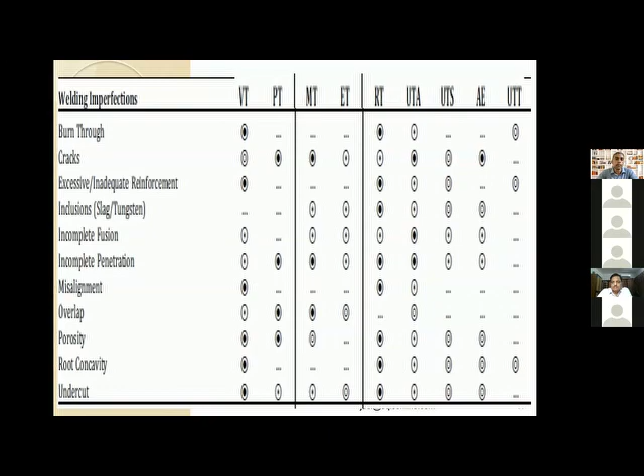The best method, if it is on the surface, is PT. If it is on the subsurface, it is MT. And the other way you can find it is using eddy current testing, where you have to use specialized electromagnetic probes on the OD of the shaft, and that will give you maximum probability of detecting such cracks. This is just a hunch, but it requires a lot of physical verification. You have to have a known defect with the crack and make sure the equipment is able to detect that crack before you implement it on an unknown component.

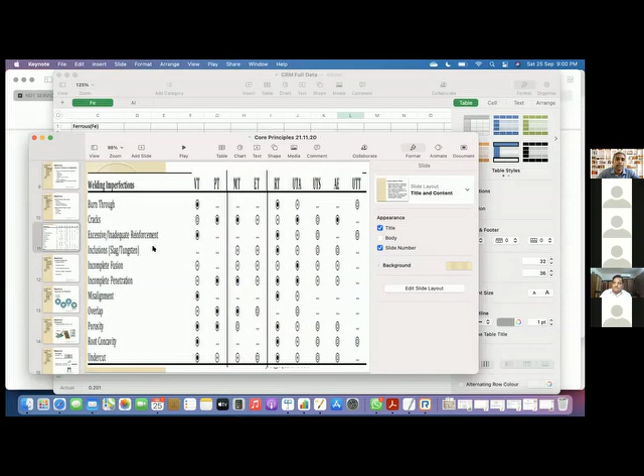Can you tell, who's SMG? Yeah, this is Santosh from here. Santosh from? Hello, this is Santosh from Fiat.

You are from which industry, by the way? I'm sorry, I'm from Fiat, not Fiat, I'm from the automobile industry, sir. Okay, automobile, Fiat. Okay, with Rege, Anand Rege.

The point here is any crack in that metal doesn't stay on one plane. So if I were to macro etch a particular layer and try to find out, I'll only find a dot there, but it will actually be a crack running its roots deep inside the surface. So any erosion method or destructive method will not be the right way forward.